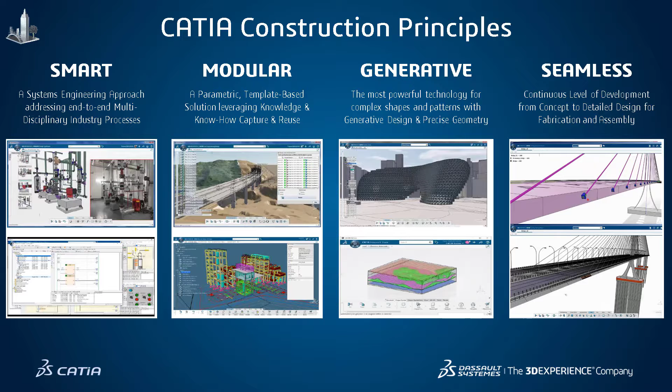It's also constructing at the scale of infrastructural works, whether it's bridges, roads, railways, and design of large-scale networks. The principles for our CATIA construction portfolio are to be smart, modular, generative, and seamless. Seamless means continuous LOD from concept to detailed, including fabrication and assembly information, all within that 3D mockup. Generative, it's a powerful generative parametric modeling machine. Modular, it's very parametric, you can create intelligent adaptive templates that embed knowledge and know-how. And smart, in a sense where you can define your requirements and execute a systems-based approach to multidisciplinary processes.

The thing to remember though is CATIA is a part of the 3D Experience platform. This platform has one data model, one collaboration environment, and all of the brands that develop products are integrated into this platform. They share a data model, and they're interwoven, so that you can start a model in CATIA and open it up in Simulia for simulation. You can bring it into Delmia for manufacturing, and then manage project management with ENOVIA. So it's a real inclusive platform that brings together all of our applications.

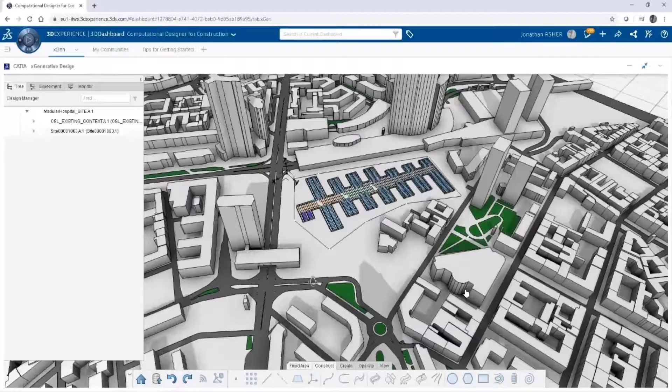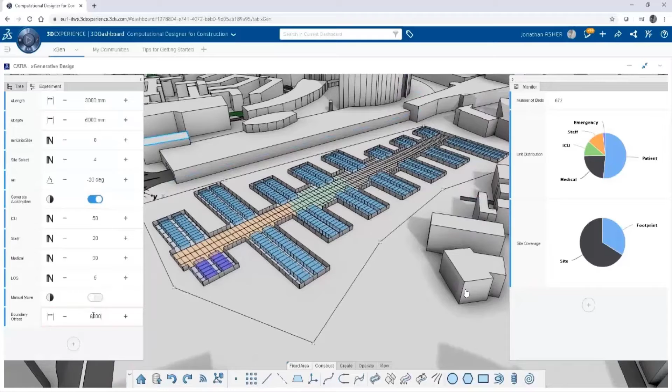Another example of where that's being put to use: we've got the parametric components, parametric units. We've developed a smart space planning algorithm for turnkey hospitals with a partner located in China. This was developed early last year in response to the COVID crisis in Wuhan, where they needed to build rapid hospital facilities to support the rising cases of COVID.

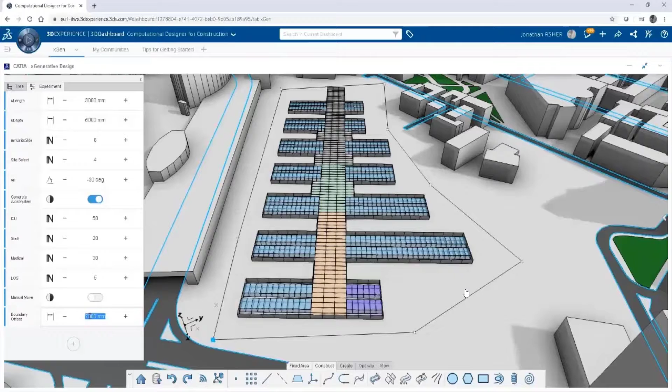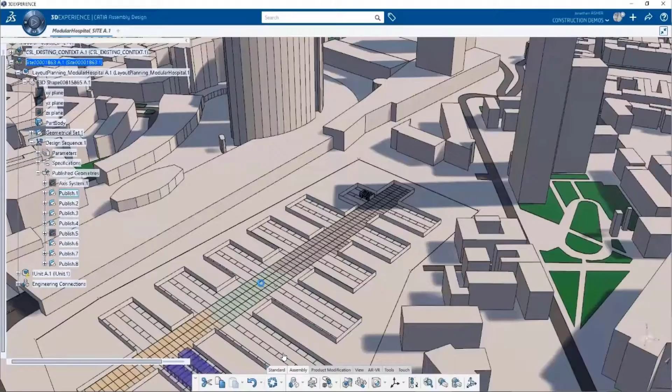Here's a look at the module that was the standard module issued by the Chinese construction authorities. We insert that module into the space planning model, and you see now it maintains that parametric association, so as we update the 3D model, all of the layout of those units updates accordingly.

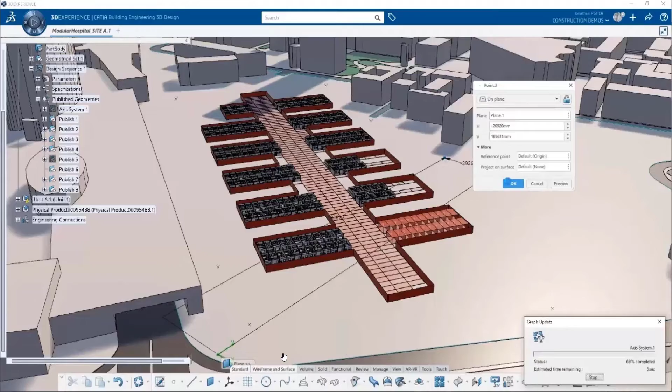These units we instantiated at a relatively low level of detail, because later on, once they've been instantiated, we can add these higher level of detail components. So that was a generative framed wall that you saw, an xGenerative Design model that's driving the geometry of the framing and everything like that.

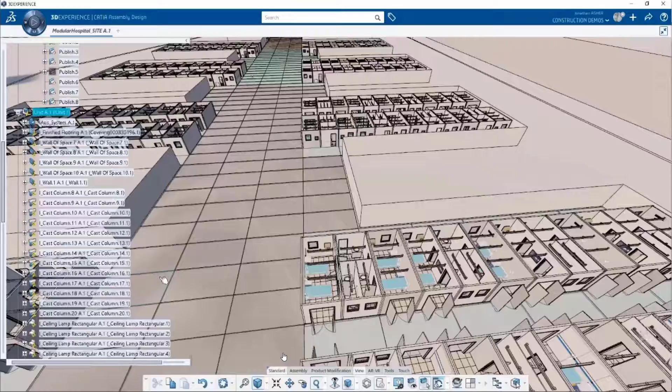And it's been embedded in what we call an object type. That object type is inserted into the 3D model, and then you have access to those parameters. In this case, we inserted the model using incorrect alignment parameters, so we're going to adjust those parameters and see how it propagates throughout the model.

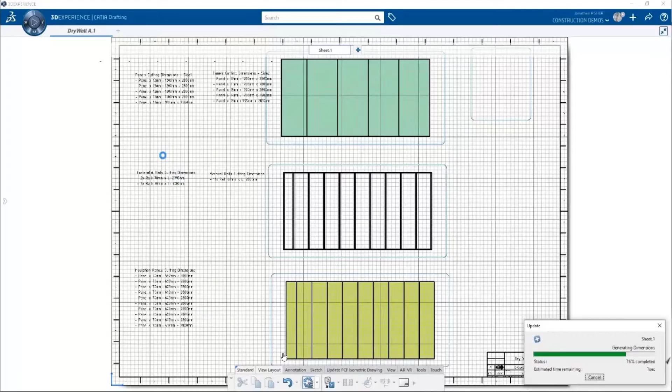Included in each one of those templates that we just instantiated are the manufacturing information, the fabrication information. So that information can be extracted for the machines for fabrication, but it can also be extracted, and the assembly drawing that needs to go out to the shop can also be extracted.

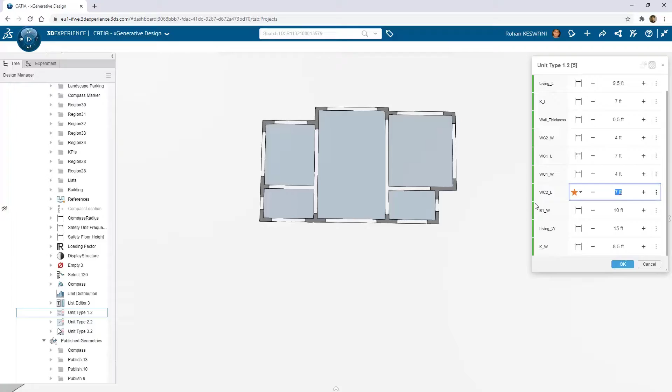This is another example of a project we've worked on recently with a large property developer in India. The challenge for them is they receive opportunities to purchase land on a regular basis, and when the opportunity arises, they need to find an architect to help develop a scheme to validate or decide whether that project is financially feasible or not. This takes time, and oftentimes too much time, and they don't receive enough design options or information. So it's challenging them to make an informed decision.

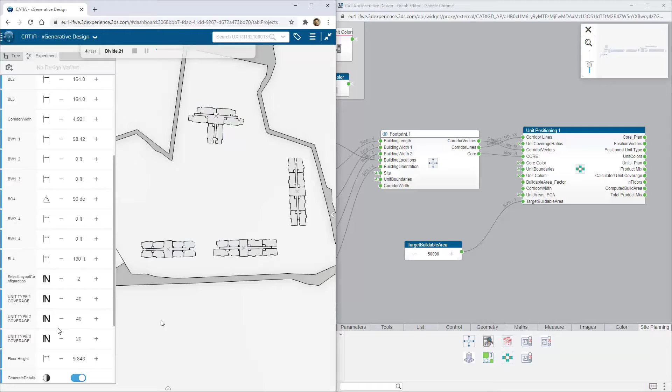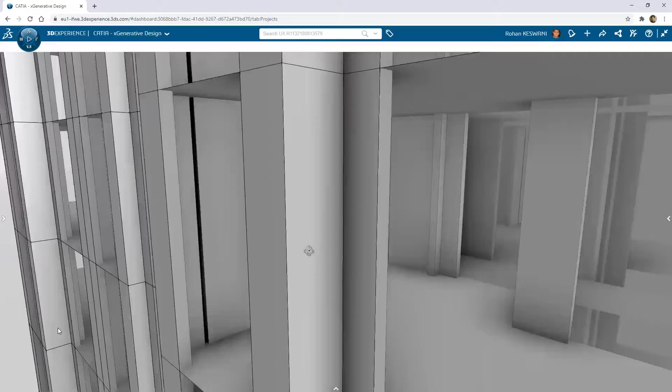So what we've done with them is develop this xGenerative Design model to help them evaluate potential sites to purchase and develop, uniquely for residential properties. They have a set number of residential units they prefer to build, so this generative algorithm takes a site as an input, along with a number of preferences or site properties they'd like to optimize for, and then the algorithm lays out the units in an optimal way given the site configurations, based on core placements and orientations.

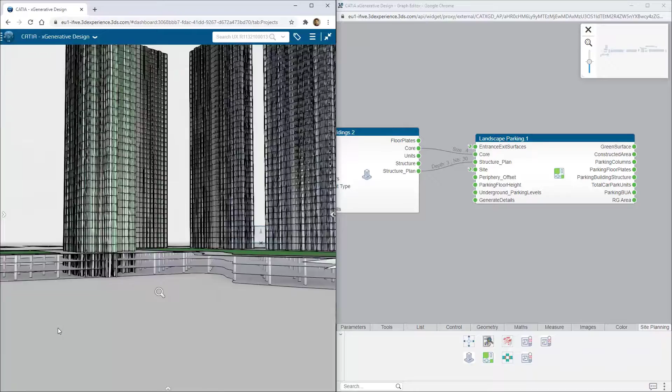The algorithm then produces the 3D model, it generates the structural model, and this is the skeleton that can be used as a support, or as the context within which you instantiate your more detailed units.

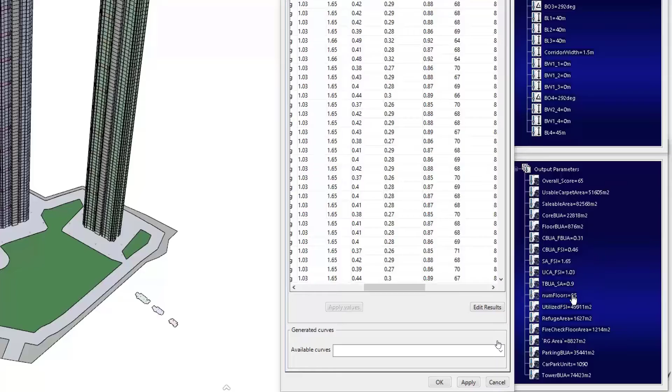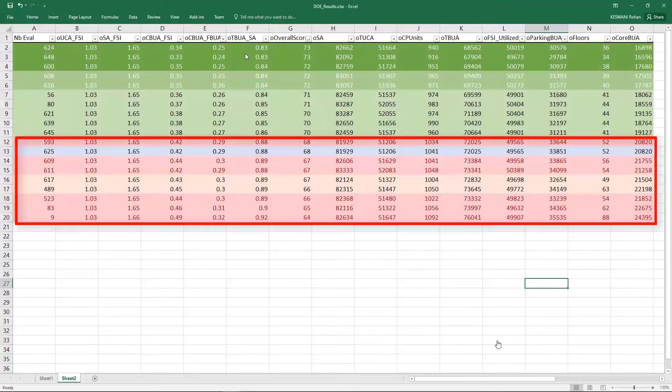This model is going to output a number of KPIs, and one exciting thing is you take those KPIs into what we call the optimizer. The optimizer asks which parameters you'd like to iterate and which you'd like to evaluate. You set a number of iterations within a certain range, and it outputs values recorded into a table. You can pull it into Excel and crunch numbers to find variations to classify or look at closer, like we see here.

So this is a way to take it one step further. You create your generative model, integrate it into a design of experiments engine to produce variations, and learn as you design and refine the design with real big data.

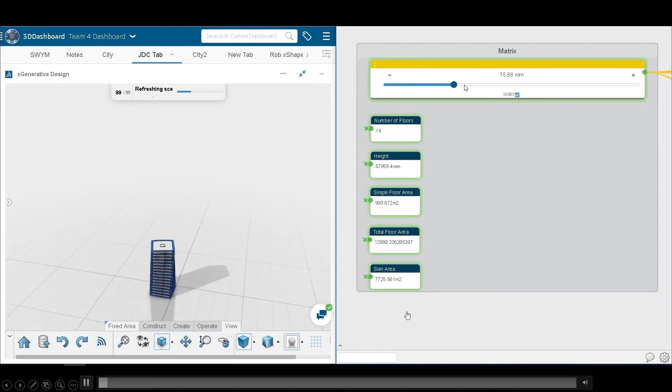This last example is a look at how XGenerative design has been used in a hackathon that we organized in 2019.

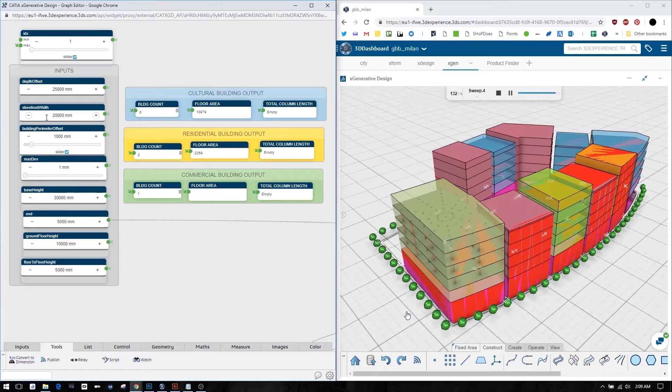We've worked with a number of great architects in the past developing XGenerative design so that it meets the needs of our users. One of the ways we work with architects is by organizing hackathons or events to get people using the software. We did it before the application was even released as a beta product, back in 2017.

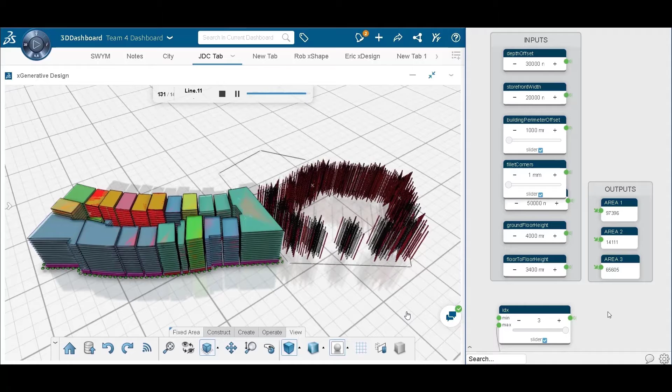This last hackathon from 2019 was exciting because it looked at how we can integrate XGenerative design into an urban context, using it as an urban design tool within 3D Experience City, our big data GIS-like software application that's also available on the web.

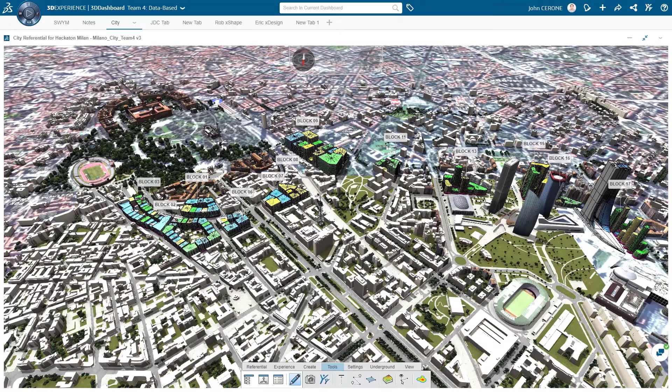Here's a look at 3D Experience City. This team, led by a group from SHoP Architects, developed this generative city block. This city block is able to transition from the old context of the Parco Sempione to the more modern area of the City Life neighborhood.

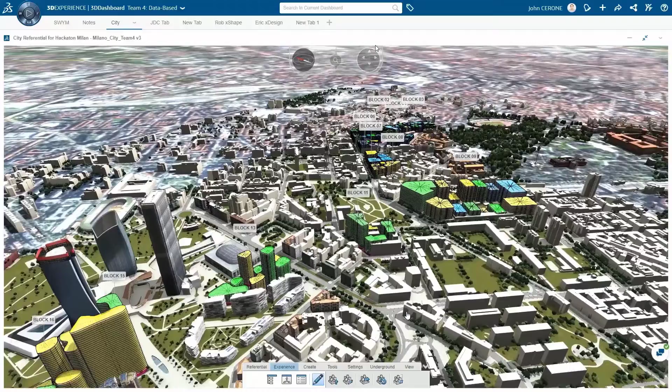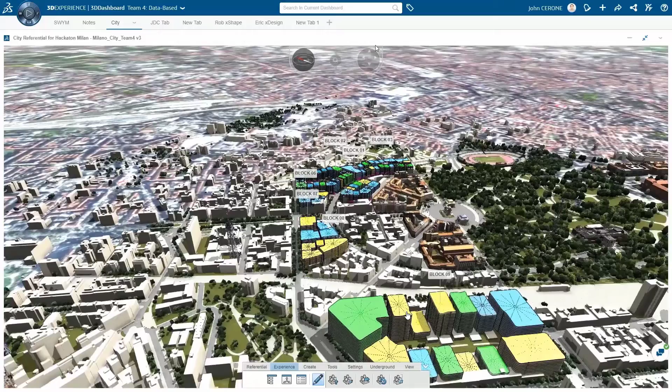As the city block transitions from the old, where you have one building typology of rigid small buildings butted right up next to each other, to the City Life area, the buildings get rounder, there's more space between them, they get taller, and they become more modern.

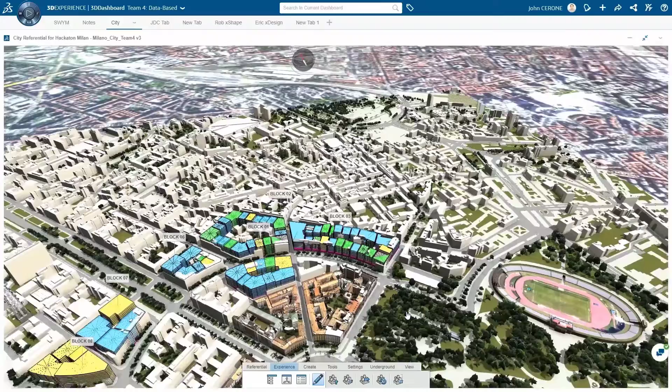This generative system also takes data in from the city context to help balance the amount of residential versus commercial versus mixed-use spaces that go into each city block, and that's the color represented here. What is the building program?

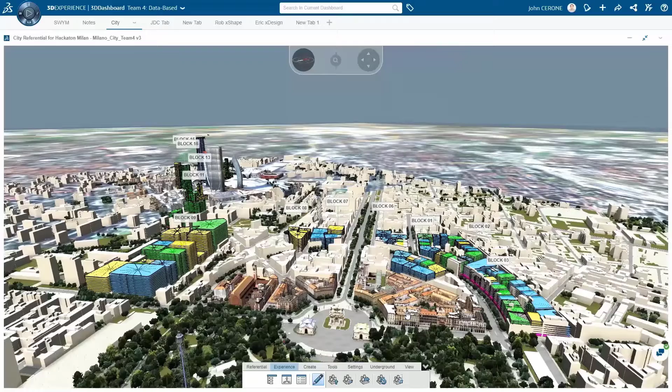Finally, this can scale, and the goal in all of this is to build the 3D Experience Twin, which is an extension of the virtual twin because it includes relational data as well.

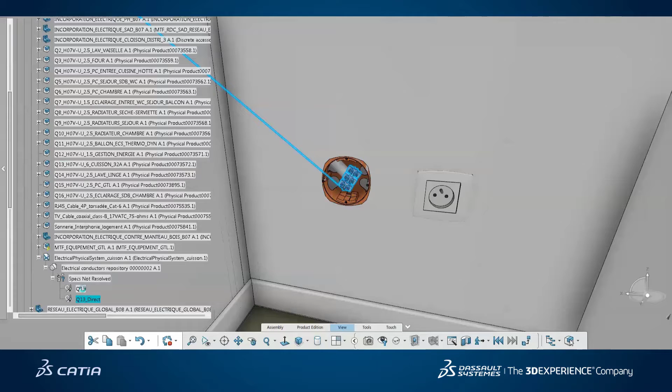This is an extreme example, but it shows the power of the 3D in a database, because the 3D Experience platform is on the cloud. All of the objects are on a database, and they have links between objects. So what we saw there is a relational link between the switch, the power switch, and the power outlet. By navigating through the relational link, we highlighted the geometric link through the conduit.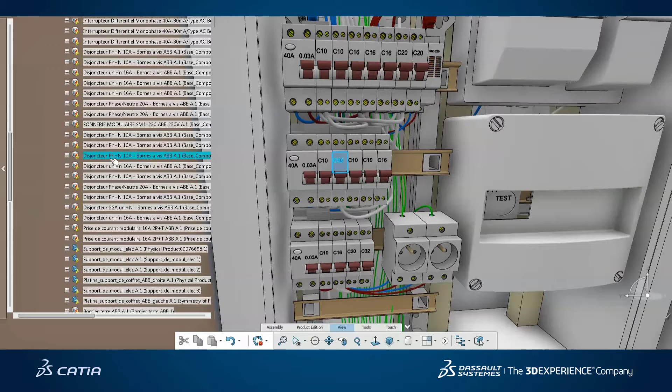Each one of these features is a PLM object, an object that lives in the database and has all of its information attached to it—the specification of the product, the life cycle of the product. In this case, we see the spec sheet, and it's all there attached to the 3D object.

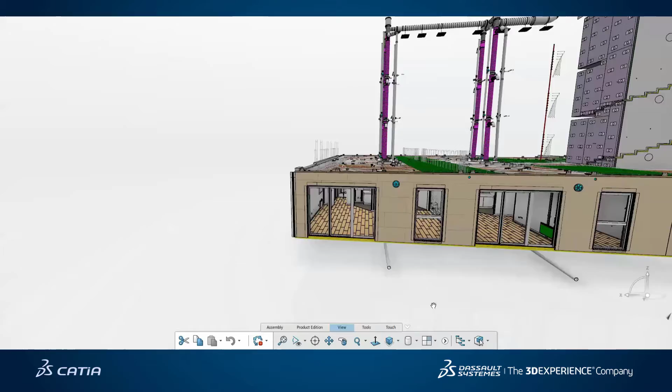This is again an extreme case, but a beautiful case of the scalability of CATIA and the 3D Experience platform. And what is that used for? It's used to build that 3D Experience Twin.

This is a final video about the Brock Commons, showing how, on a project where the 3D Experience platform was deployed as an engineering and construction tool, this project was able to save $3.5 million on a $50 million project, and over 6 months in installation time.

All of the CLT panels had been precision cut straight from the model. All of the assembly, offsite and onsite, had been simulated and optimized, and it allowed all of the trades working on site to fully invest into the model, to fully put their faith into it, and really maximize the return on investment for working things out in the 3D model—in that virtual universe—before trying to work things out on site.

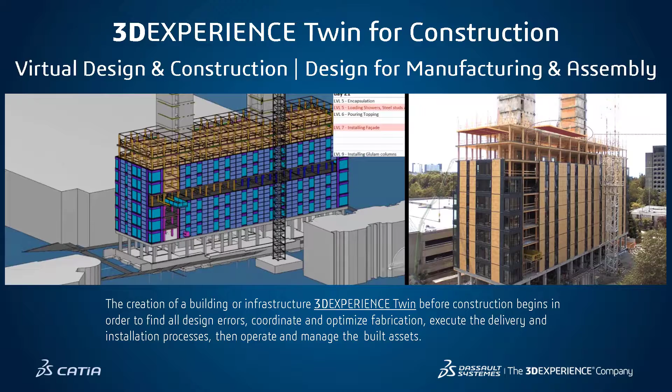And so with that, I thank you for your time. I hope this has been an entertaining and insightful lecture showing some of the recent things we've been doing with XGenerative Design and CATIA as a whole, building parametric generative models for design for manufacturing and assembly processes that I am thoroughly convinced will revolutionize the construction industry. It's really only a matter of time.

The industry as a whole is really struggling right now to maximize margins and maximize gains, and really transform itself as technology is disrupting all of the other industries around it. So thank you for your time. Have a great day.